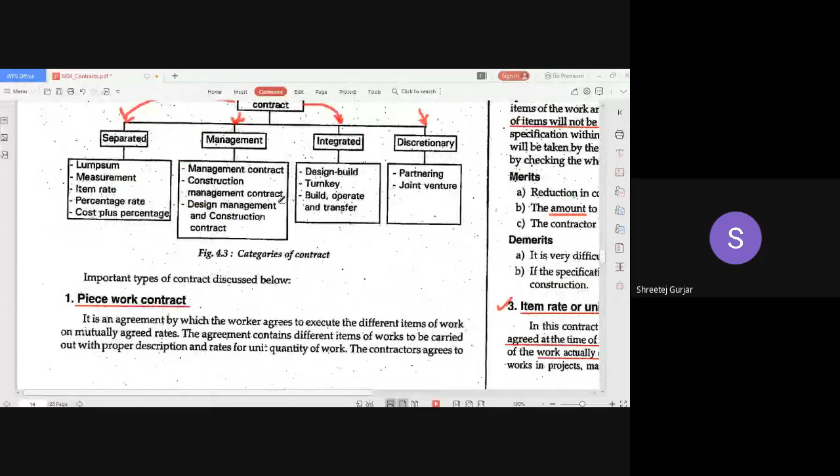First, we shall discuss a few important types. The first one you usually see is piecework contract. As the name suggests, it is giving a contract for a small piece of work, or many small pieces of work which are distributed and may be same or similar.

For example, if you have excavation work or patchwork which requires unskilled labor, whenever you have small pieces of work in large number, you give out contracts which are called piecework contracts.

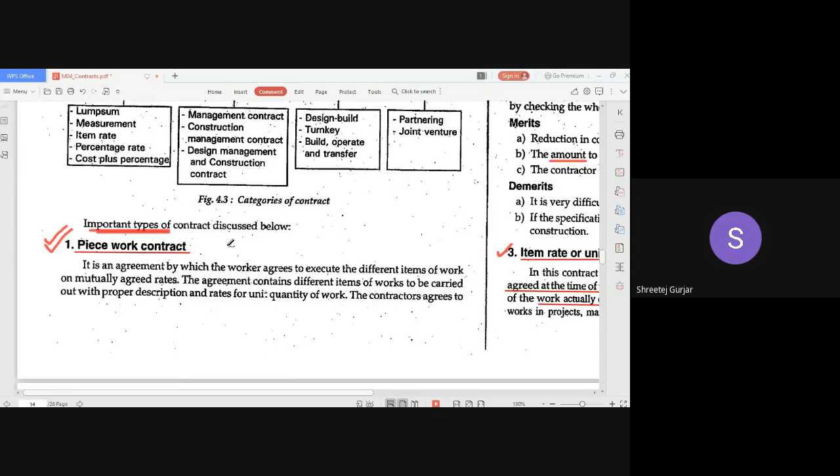Now, merits and demerits of piecework contract. It is suitable for small work. Since it is unskilled work and not too much skill is required, it is very economic, and it can be finished out very quickly.

Instead of moving successively from one piece to another, completing the first, then second, then third, if we give all the pieces to simultaneous labor and start all the work together through piecework contracts, it can be completed simultaneously and the work will finish quickly. If you have small works which are spread out, piecework contracts are very beneficial.

Regarding demerits, what you usually see in the field is workers become lazy because they are paid based on daily wages. So workers try to increase the number of days required to complete a piece of work because they want more wages. Because of that, the rate of progress of the work becomes low. That is one demerit.

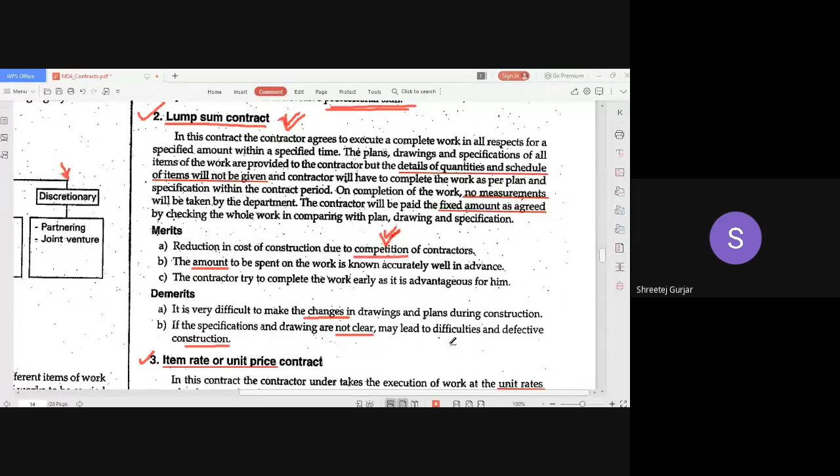This is regarding lump sum contract. Then moving on to the third thing, that is item rate or unit price contract. All the contracts that we have studied up till now relate to this unit rate.

Unit rate or item unit price contract, wherein what we do is we fix one unit rate for every item of work, and that is done at the signing of the contract, at the time of tendering, that particular unit rate of each item of work is agreed upon. So that rate is fixed during the signing, and after the construction is done, what we do is the detailed measurement of the work actually done, and then you pay for whatever is executed.

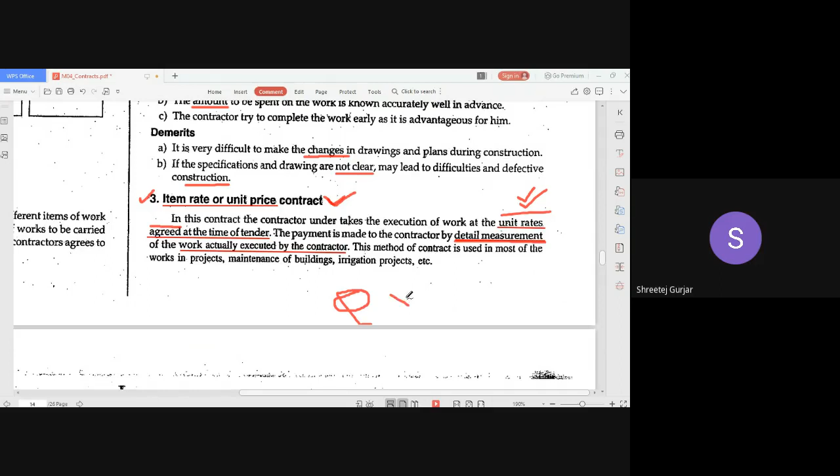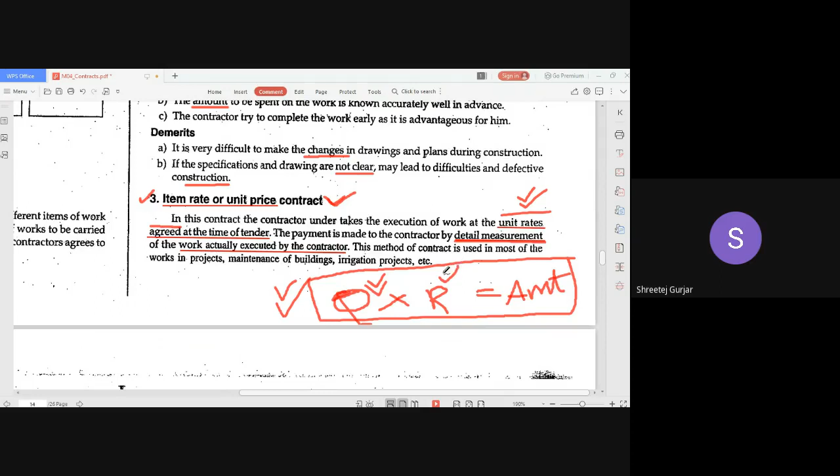Whatever quantity is executed, you take that quantity q, multiply by the unit rate r, and then calculate the total amount. This is what usually is done in contracts, this particular item rate or unit price method is followed. We have also done this in previous chapters: measurement is done, that is quantity calculation is done, unit rate is multiplied, and then the total amount is calculated. That's the unit rate or item price method.

So no disputes will occur between contractor and owner, because the contractor will be paid by measurements. So even if the owner says build something extra, the contractor will build it, then measure that particular quantity, add it, and it will be multiplied by the rate, and he will be paid. So no disputes will arise from increase of the quantity or increase of the scope of the work.

If any drawings and specifications are changed, that is also not a problem. They can be changed - not in lump sum contract, but here drawing and specification can be changed, no problem. One more merit of this type of contract is finalization of the bill is done after taking the measurements, hence it is economical. Because we are doing detailed measurements, not just giving approximate values, since it is done exactly by measuring, it will be economical, unlike lump sum.

Coming to a few demerits: the final cost cannot be determined before completion of work. This is a demerit, because in lump sum contracts we will be knowing the total final cost of the project, but here we will get to know the final cost only after completion of the work. So scrutiny is required.

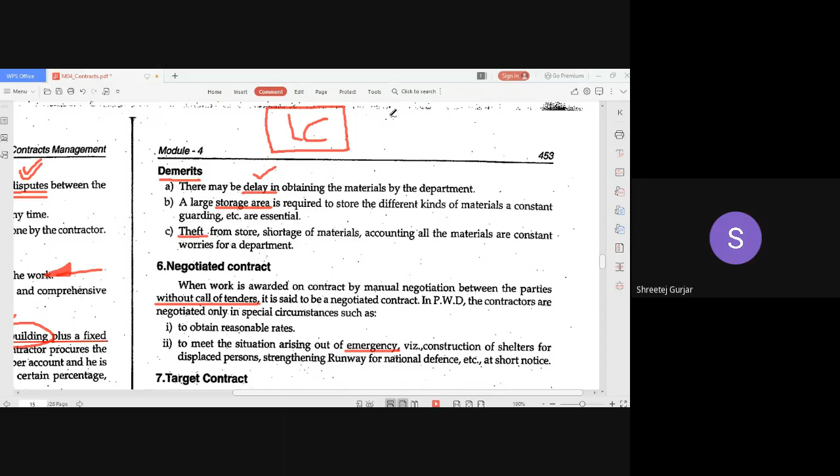Then coming to negotiated contract. Here no tenders are called, if you have certain contractors known to you. If the department has contractors who have done previous work for them, who are well known, who have done similar kinds of works, and are very experienced and trustworthy, the department will directly call them, negotiate a few terms, and give the contract to them, instead of calling tenders. That is called a negotiated contract.

This is usually done in special circumstances, whenever there is an emergency, like construction of shelters for displaced persons, or whenever there is any natural calamity and you want to do emergency construction. Then usually we go for negotiated contracts, instead of calling tenders and going through that process which takes a lot of time. We negotiate with the contractor directly and then give them the contract. I hope you have understood what is meant by negotiated contract.

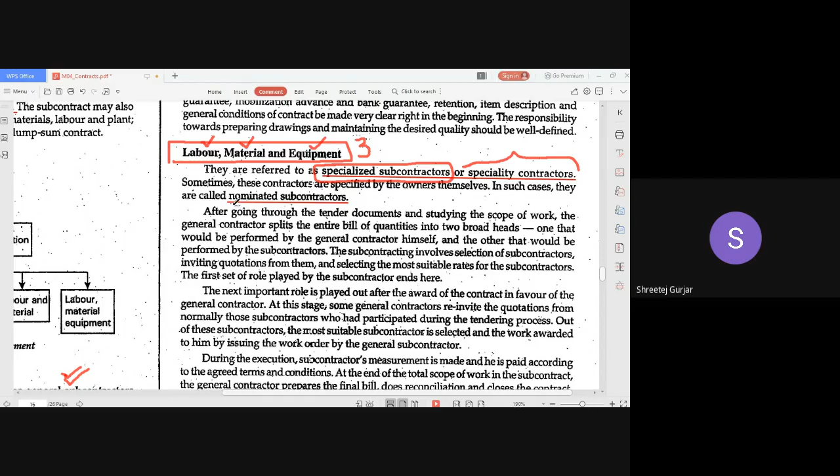specialized subcontractors or specialty contractors. So in such cases, sometimes these contractors are specified by the owners themselves. So owners will specify these kinds of subcontractors themselves. Main contractor will be there, and the owner will tell the main contractor to give the subcontracts to these special persons - they will be referred by the owner himself. So in such cases, those subcontractors will be called nominated subcontractors. Okay, so this is regarding labor, material, and equipment.

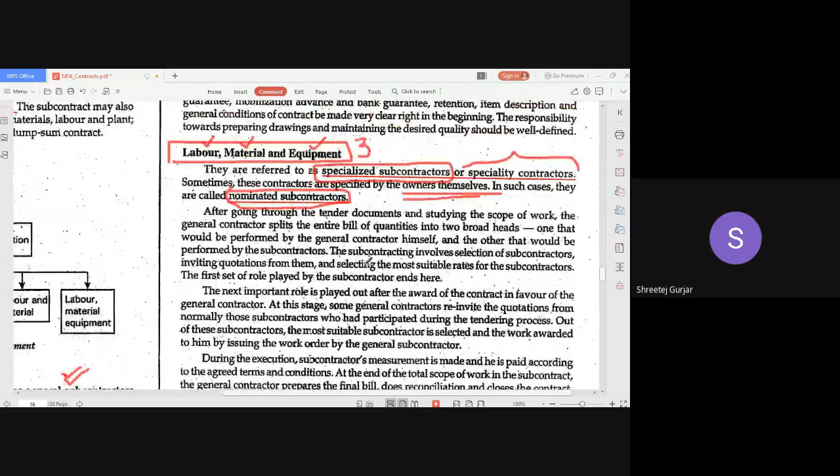Coming to the next important thing is regarding selection of subcontractors. If you are the main contractor, how will you select the subcontractors? How will you give them the work? How will you form the document? All those things, because there has to be some agreement, some contract between the main contractor and the subcontractor. There has to be some legal binding between these two. So what is the process?

The same process that is followed between the owner or the client and the main contractor, whatever we have learned up till now, the same procedure has to be followed between main contractor and the subcontractor. Similar procedure or the same procedure has to be followed. So what does it consist of?

The same thing: floating inquiries. Inquiries will be given out, like giving out tenders, then collecting quotations for that particular tender, then evaluating those quotations, then shortlisting of the contractors, and then giving out work to them. Giving out work to them is nothing but giving out work order - how the client will give the work order to the main contractor, similarly the main contractor will give the work order to the subcontractor.

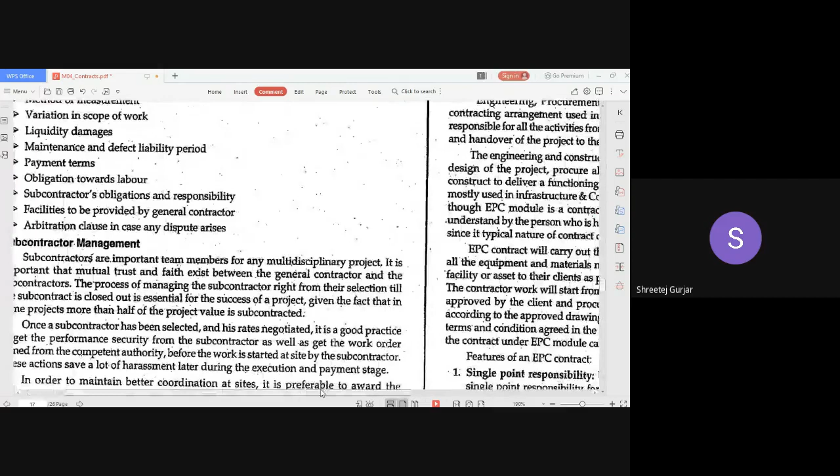Regarding subcontractor management, some general things: you have to divide properly. If you want to give subcontract, you should not give it for a petty item of work - like bar bending for one contractor, shuttering work for one contractor, concreting work for one contractor, you should not divide for individual things. What you can do is give form work, bar bending work, reinforcement work, up to concreting work, all of this to one contractor.

Then regarding any other combination, painting work - entire painting work from putty work, whitewashing, up to surface finishing, all those things can be given to one contractor. That's how you have to manage the subcontracting. You have to divide based on the type of work, club similar works together, and give the contract.

Make sure you give proper work orders to subcontracts, because the laborers should not be waiting for the previous subcontractor to finish. If you give the subcontract for painting work before finishing the wall work, that person will be waiting for the subcontractor of the wall to finish. So such delays should not be given.

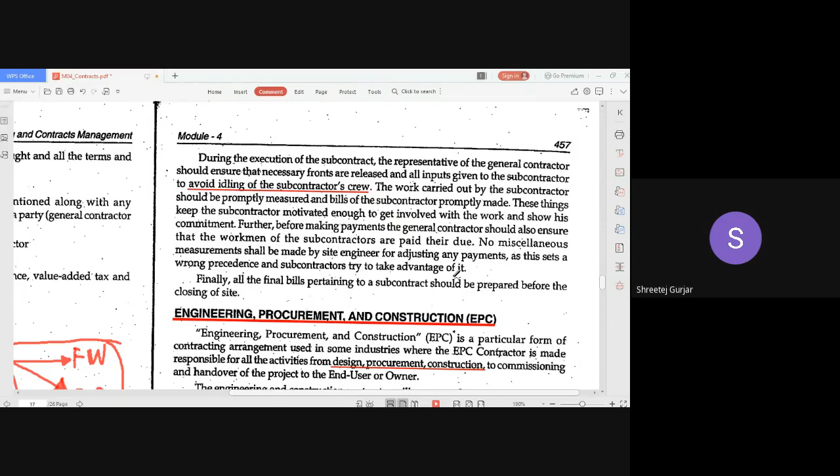Avoiding idling of the subcontractor's crew - meaning you do not make them sit idle, because they will be given payment, daily wages will be given to the laborers. So make sure that is not the thing. All the time the labor should have some or the other work to do, so they should not be sitting idle.

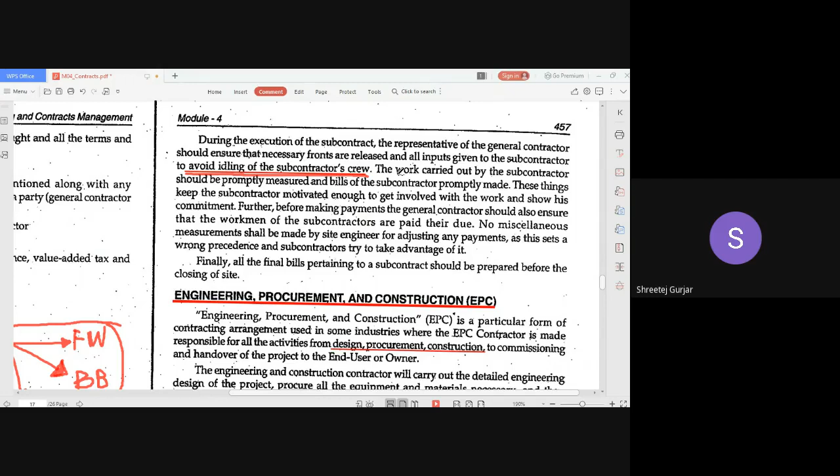So that is regarding subcontracting, all the things regarding subcontracting we have covered. So any doubt if you have in subcontracting, you can ask. If you want to share anything, if you know extra things, you can share with your friends.

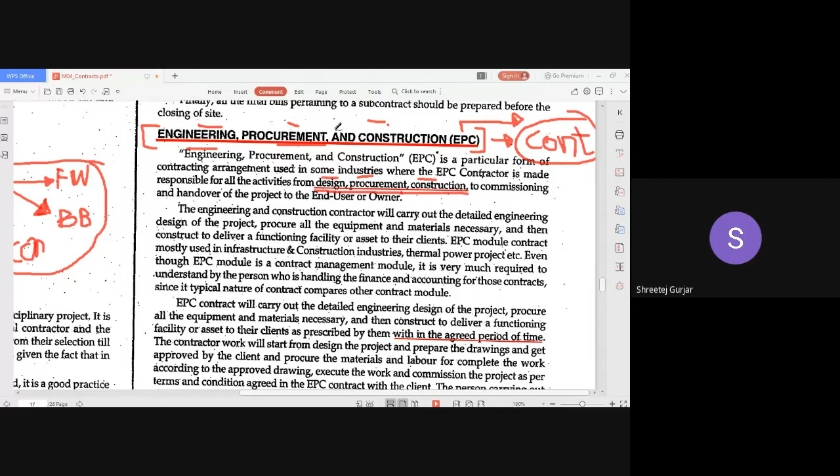See, usually what happens is the owner or the client or the department will have the designs ready with them. Designs, specifications, drawings, plans, all the required things will be ready. That will be given to the contractor and told to execute. The materials have to be procured, and construction has to be done. So that is nothing but the usual contract which we follow. Procurement and construction is what is done by the contractor. Engineering or the design is done by the owner or the client or the department.

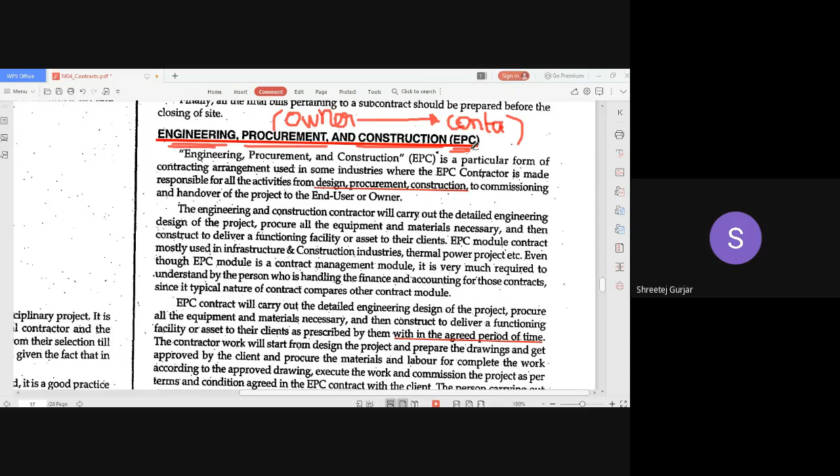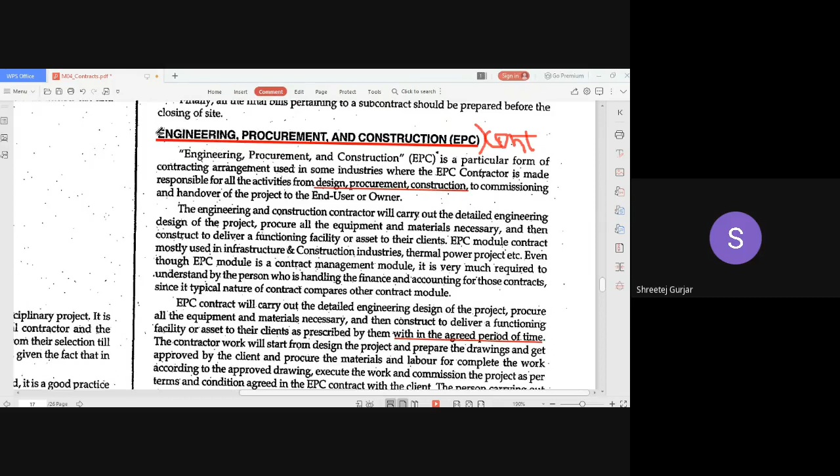So in this particular EPC contract, the engineering or design of the elements, the specification of the elements, is also done by the contractor himself. The contractor is responsible for the design, for the procurement of the materials, and for the construction. All three things are done by the contractor. Design is also not given by the owner. So this is called an EPC contract. I hope you have understood the difference between a normal contract and an EPC contract.

So an example of this EPC contract is like when an owner or a client gives a tender saying that you want an output from that particular construction. You want to build certain thing, say a thermal power plant, and that thermal power plant has to have an output capacity of say some 3 gigawatts, usually in gigawatts, not kilowatts. The output that is needed is 3, 4, or 10.

So the owner or the client will say that you design, you get the materials, and you construct, and the output of that particular thermal power plant should be as per my requirement, say 4. So that is how the EPC contract is given out. The owner will not do the design, any drawing or any plans, any engineering drawing, anything - all the things have to be done by the contractor himself. That is an example of an EPC contract. So the capacity will be given out by the owner, and the client can call or invite tenders.

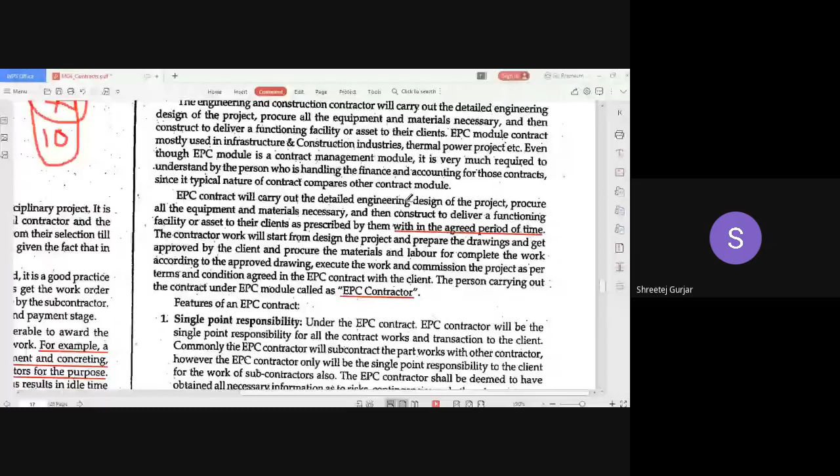Usually, what will be the timeline? The timeline will be given, and that will be agreed by both the parties, and then the output that is required from the particular project is agreed upon, and the contract will be given. So this kind of contract is an EPC contract, and the contractor is called an EPC contractor.

We require such EPC contracts for any special kind of buildings or projects, like thermal power plants or anything which is required to give some output, capacity-wise, say a water treatment plant wherein a certain capacity has to be treated daily. So that particular contract is given in terms of EPC - engineering, procurement, and construction.

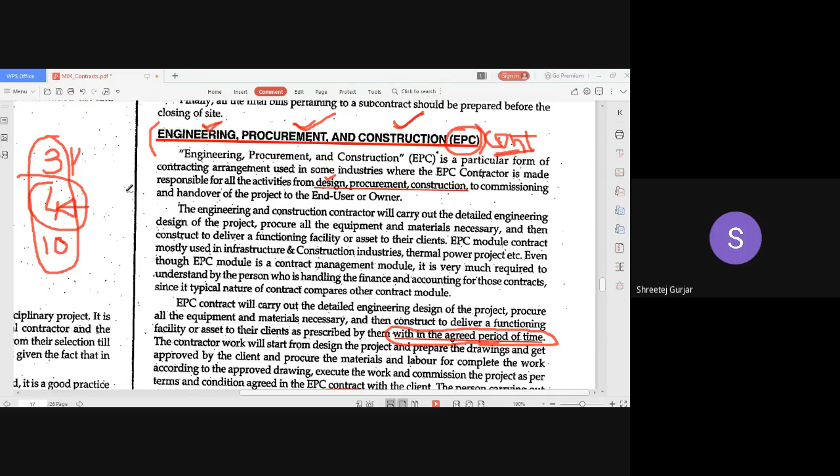So here are a few features of an EPC contract. First, single point responsibility, meaning the contractor will be whole and sole responsible for the entire thing. There will be a single point of responsibility - the contractor will be responsible for everything.

Then milestone basis progress, meaning certain things are achieved. For example, in a dam construction, the owner or client has given that you want a dam constructed of a certain storage capacity. So once the contractor has taken that work and finished the foundation work - the shear wall work and all the foundation work is complete - that is called one milestone. That particular section he has completed, so he will be paid for that work.

Then after completing up to the level of the gates, that is also considered one milestone - he has completed up to a certain section, so that amount will be paid to the contractor. Then after the completion of the whole pitching work and finishing work, he has achieved one more milestone. So in terms of milestones, the contractor will be paid.

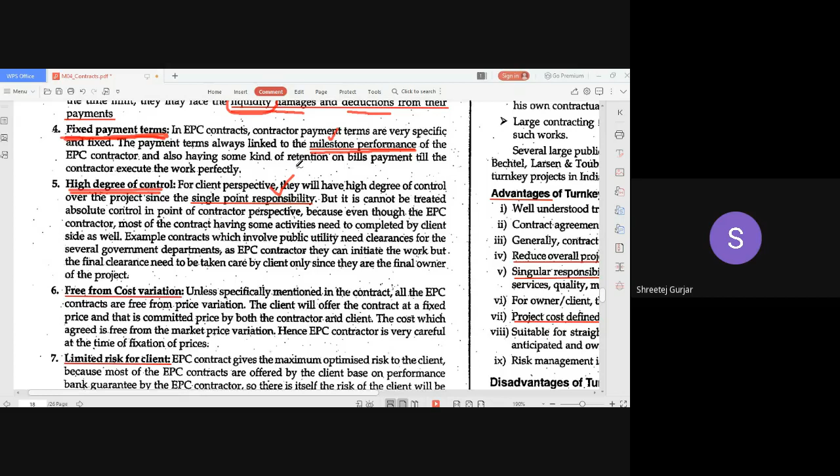Free from cost variation, because the contractor has himself given the design. So the contractor, as per his need, will procure the materials, and if there is any variation due to fluctuation, that will be considered by the contractor, who will make arrangements to keep it properly within cost so it is not exceeding. The contractor will always try to get some profit. So, free from cost variation—unless specifically mentioned in the contract, contracts are free from price variation.

The next feature is limited risk for the client, because the client is not responsible for any design—the entire thing is on the head of the contractor. So there is limited risk for the client. The main risk is for the contractor, but the rewards are also large, because whenever there is high risk, there is high reward involved. So, limited risk for the client, but high risk for the contractor.

So this is regarding your EPC contract. This is just a brief discussion regarding EPC contract. There are many other things involved in EPC contract, but we have just looked briefly into what is meant by EPC contract and what are the general features of an EPC contract. For your level, this is what has to be covered as per the syllabus. EPC contract, you have understood. I hope you have understood. Can you just confirm?

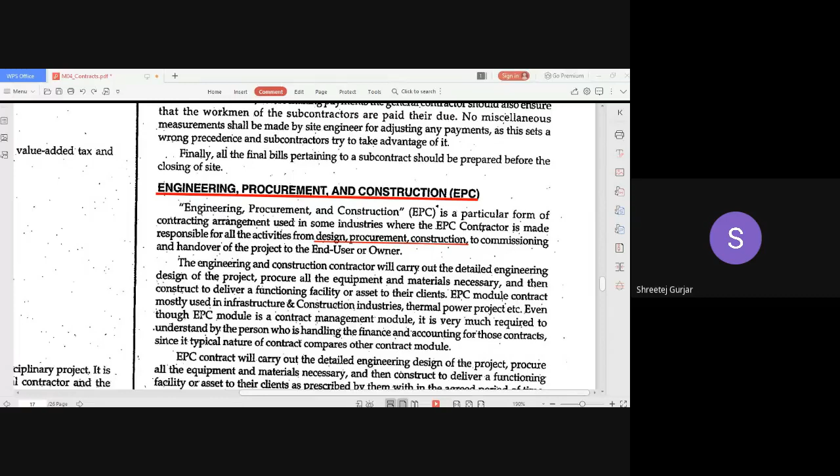Okay, EPC contract. So the next type of contract, very interesting—next type of contract is turnkey operation type of contract, turnkey operation. This is also a type of contract which is very similar to EPC contract. Turnkey—how do you start your car or your bike? You put your key and you turn it, then it will start, right?

Usually your car—turnkey means the contractor has to make sure that everything is ready. What the contractor has to do is make sure everything is ready, and only the key has to be put and turned so that the particular project will start. Up till that point he has to complete, and he has to hand over that particular project to the owner or to the department.

The owner simply wants to turn the key, like how you start your car—you just put your key in. The owner will come after the completion of the project, and he will just put the key and start it. Up till that point, the contractor has to finish and submit to the owner, and the owner will take over the facility. This is very similar to EPC contract, but here the contractor finishes and hands over the project to the owner in turnkey status.

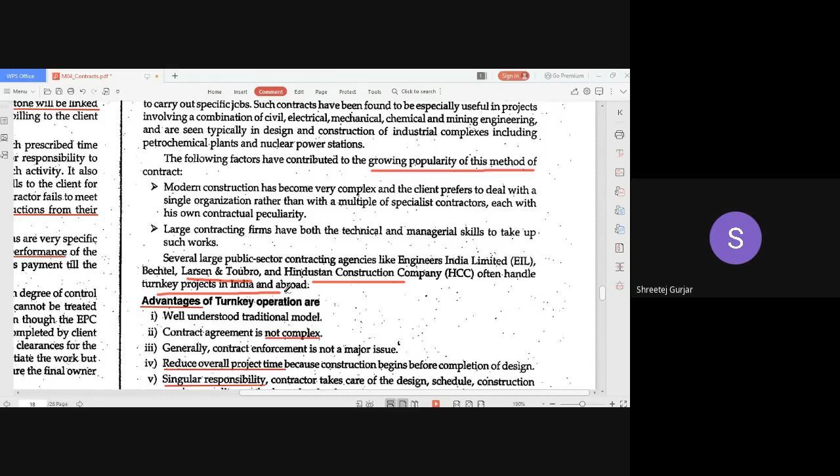Okay, so I hope you have understood this. This is a growing popularity, this method is very much preferred. Usually in large public sector contracting agencies like EIL Engineers India Limited, L&T Larsen and Toubro, HCC Hindustan Construction Company, often handle turnkey projects in India and abroad. These kind of turnkey operations are very advantageous when the contract agreement is not complex. It is very easy and it is a well established, well understood traditional model.

It is not a new thing, it is a very old one. Here the overall project time is reduced because construction can begin before completion of the design.

There is singular responsibility because the entire thing the contractor has to take care of - the design, the scheduling of the work, the construction. All the things he has to take care of and make sure quality is maintained and everything is complete, and then handed over to the owner or the client.

For the owner or the client, the risk is transferred to the design build contractor. As in the EPC contract, the owner is at less risk, but the contractor has high risk, and also he has high rewards.

Project cost is defined in an early stage and has certainty. Not like normal contracts wherein after measurements are done, the contractor is paid - not like that. The project cost is properly defined early, and then work is started, because the entire thing is in the hand of the contractor itself. So he can define whatever is needed, properly get the project estimate, and then start the work.

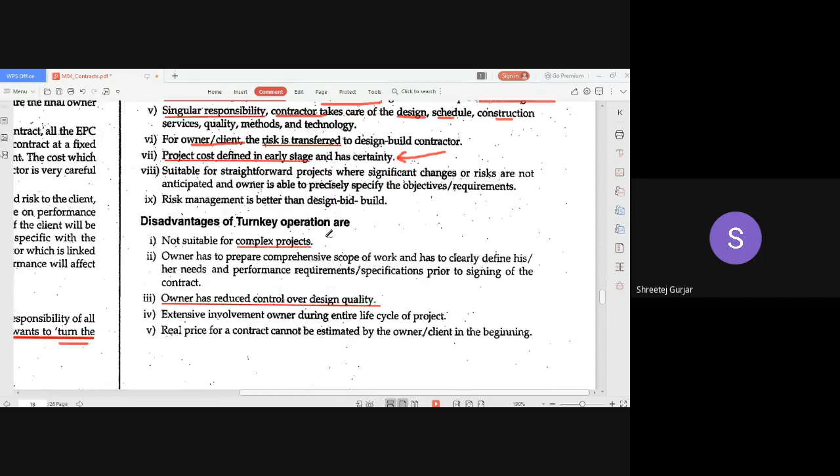Now a few disadvantages regarding turnkey operations. Turnkey operations are not suitable for complex projects. Whenever we have complex projects, turnkey operations are a bit tedious to execute, so this type of project is not usually followed when you have a complex project in hand.

The owner has reduced control over design quality. What is meant by this? Because the owner does not do the design, does not give any specifications or drawings, the contractor is responsible for that. So what can happen is the contractor may go for inferior quality of work or inferior quality of design, wanting lesser steel for example, even if it's required, just to have extra profit. So the owner does not have any control over the design.

That is one important factor that is a disadvantage in turnkey operations.

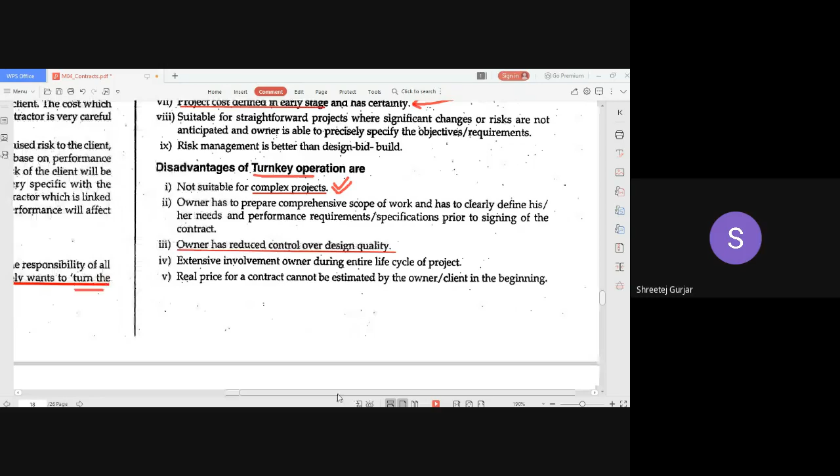Changes by the owner can be expensive and may result in heavy cost penalties to the owner. It is very difficult because the contractor is doing the design, and if the owner wants to give some input, the contractor will usually retaliate and not try to incorporate any changes, because it would be expensive for him. So the owner cannot make changes by himself in the design - that is not an option in this type of contract.

Only limited innovation is possible. Not much innovation can be done in this type of contract.

So this is regarding the turnkey operation type of contract. The first type of contract we studied, a unique type, was the EPC contract. Second is turnkey operation. Now the third thing, you might have heard of this particular contract - public-private partnership, PPP type of contracts, as we call it.

This type of contract is public-private partnership. When the government has lesser funds for large projects, whenever the government wants to execute some large project, some infrastructural project, some large road work or building construction, but does not have sufficient funds, what the government does is partner with the private sector.